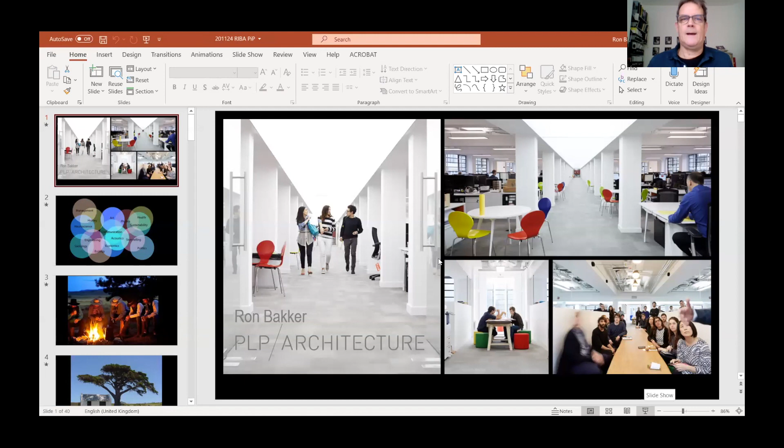Thank you very much, Ruth. I'll share my screen with you. Good morning, I am also in North London. But it doesn't seem to matter much where I am these days. Life just goes on. We actually are in the office as much as we can, because we are absolutely sure that we need to be together physically to be able to function properly. But we're running on about 80% if we're not all together. And I'm sure that's the same in education. My son's in uni and he's not having a great time, just because there's no contact. He might as well be somewhere else.

So I'm going to talk about architecture, smart architecture, and the very fast-moving technological world we are living in at the moment, and how exciting that is for architects. And we are not specialist educational architects. We do some academic buildings here and there, but most of our more interesting building projects do have an angle that's very educational. It happens all the time.

This is our office, one of the most educational spaces you'll see on the screen today. People learn all the time, and I'm assuming most of you are architects. It doesn't matter if you're not, but if you're an architect, you will know that you are able to deal with a great variety of subjects that are often very far removed from each other. And that's what we do, architects, on a daily basis. Pretty much, we're somehow relating things to art and to ecology, economics, acoustics, neuroscience, many issues, and we're actually very well placed to connect all these different strands of stuff that's happening in the world at the moment.

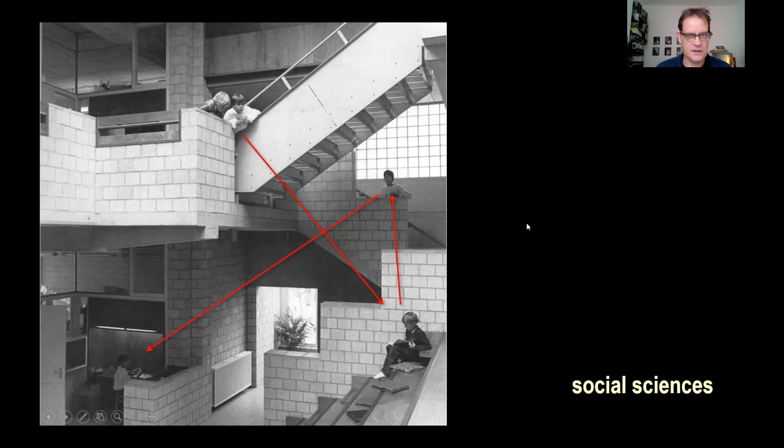Then in the 50s and 60s, we were starting to understand social sciences better, how people relate to each other, what they need in terms of communication and feeling well. That is already 60 years ago, but that's coming back with a vengeance, and making buildings that are really to do about the relationships between people and how they communicate with each other has actually sort of become our headline activity at the moment, despite all the sustainability, all the material technology. I haven't really even talked about architecture, whatever it is by itself, but we're looking at these aspects.

Working on these educational projects always meant that you're dealing with big spaces for lots of people moving around. When we did university work in Amsterdam, that was our main obstacle, how do we move hundreds of students in 3 minutes from one classroom to the other. That was our biggest problem. Not something you realize in the end of the building, but these issues are now increasingly better dealt with through technology, and that is helpful.

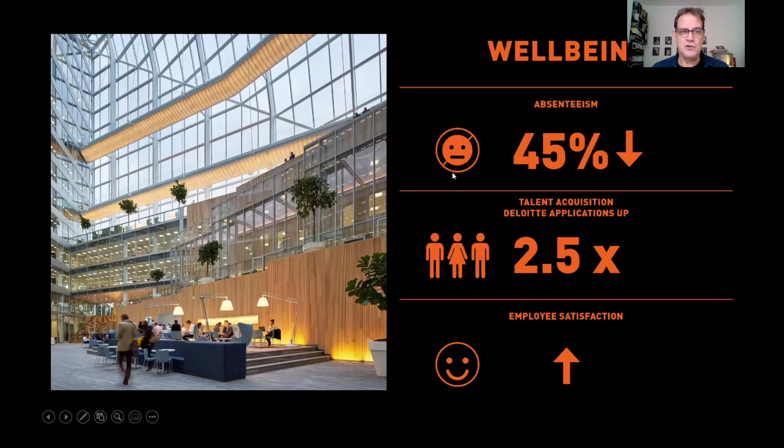And people are happy typically. I walk the building and talk to people, some I don't know, younger, older. I always ask them, how does the building make you feel? Nobody talks about the technology, nobody talks so much about the sustainability and how much energy they've used, but people talk about the space, the light, quality of the light, the acoustics, and the fact they can come together - and coming together is really what these educational buildings and work buildings are for.

When we designed the Francis Crick Institute together with HOK, that was the principle of the project: to make a great big space where people could meet, with all the separate workspaces - the laboratories and write-up places - positioned around this atrium. We were physically forcing people to talk to each other, people who perhaps wouldn't have met otherwise. We did this because we had learned from speaking to scientists that a lot of the big advances in science and technology, as much in medical technology as in any other field, come from moments where two people whose fields slightly overlap talk to each other and have an idea in common. That sets off a whole new trend in their thinking that will often lead to great advances in technology. So that's an incredible notion, and being able to design buildings around that notion is really, very, very rewarding. It seems to work.

It's a busy place at the moment. This year is a strange year, of course, and even stranger for the people working at the Crick. You can kind of imagine.

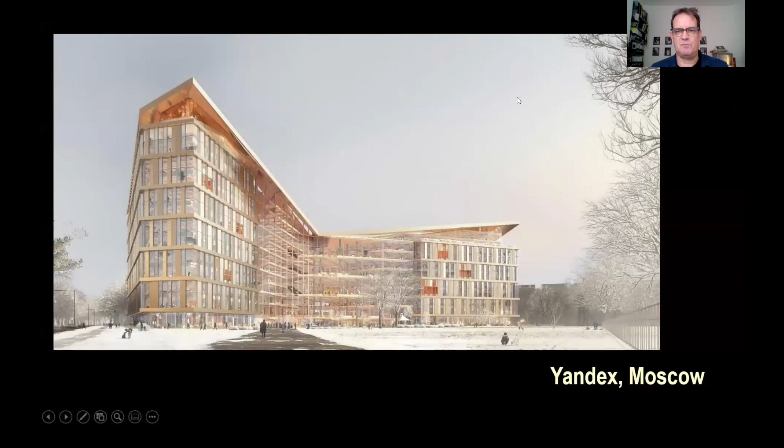So one of the projects we're currently working on is headquarters for a big tech company in Moscow, the kind of Russian Google. We've been talking for years since the first stroke of a pen about how they function together as a group of people and how they want people to learn as part of being part of their company. We've created a building that encompasses a place to communicate, but also a place that's intimately connected through digital means. So everything, all the climate, all the communication, all the work and the data, everything is connected through a very central place that organizes all of these streams of data.

It's a kind of nervous system, I suppose. We can talk about that.

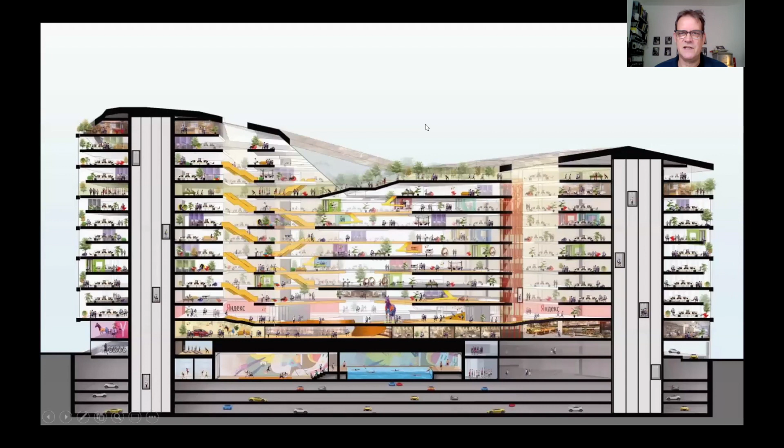The building itself does the things that we just talked about in Edge and Crick. It's very open on the inside, a very wonderful, comfortable space, lots of green, great daylight. But there are also quiet places where you can hide, and you'd be amazed how many people are actually looking for a quiet place. Office space, as we've known it for the last 50, 60 years, really isn't doing very well in terms of making great places for people to work. We have a long way to go.

So these notions of connection, digitally or physically within spaces, are starting to overlap. They're overlapping with mobility, with ecological issues, with biodiversity, with energy networks. All of these layers can now be somewhat more connected than they have ever been in the past.

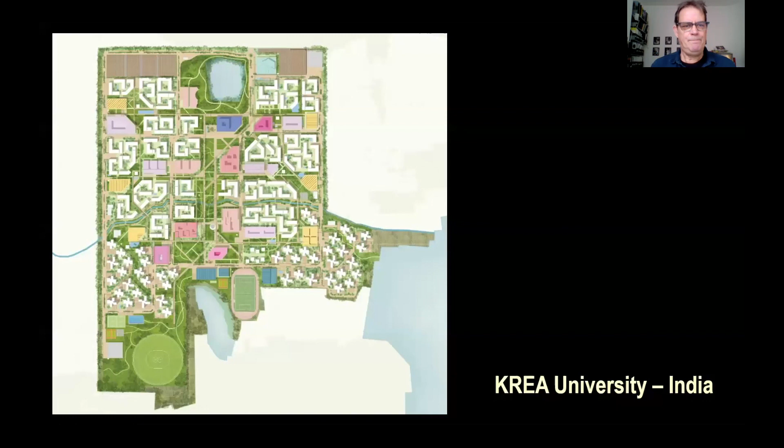And we're developing master plans for a big university in India, in the south near Chennai. This connectedness is the basis of our master planning—connectedness between people, but also between natural systems and buildings. The picture becomes very complex, but I think it's in this complexity that one can really create quality, almost in a way that turns into the background once a building is finished.

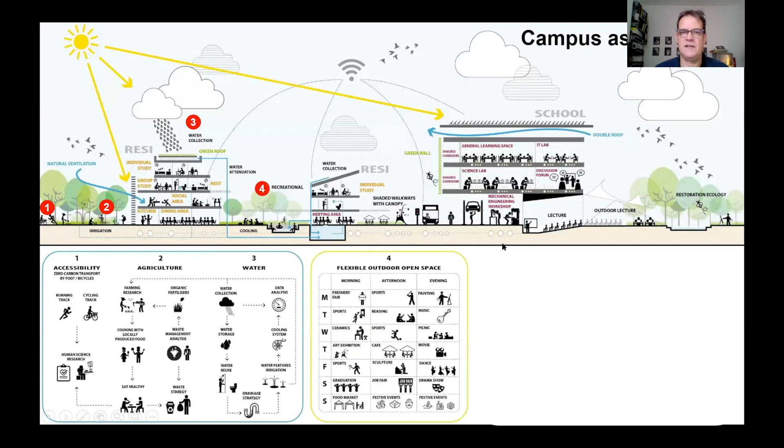So we're looking to connect issues of mobility and accessibility. It's a large piece of farmland, and there's a very strong connectedness between people and farming in India. It's very close to people's minds, actually, so why not include that in a place to learn? There's a big water issue in the area, which is part of it. We're creating all types of spaces for different activities around the campus. Everything happens in the same place—people live there, study there, visit—and the campus is connected to the rest of the world through a digital connection.

So technology and energy and ecology are connected as well. I'm using the word connected far too much, but I think it's all about this relationship.

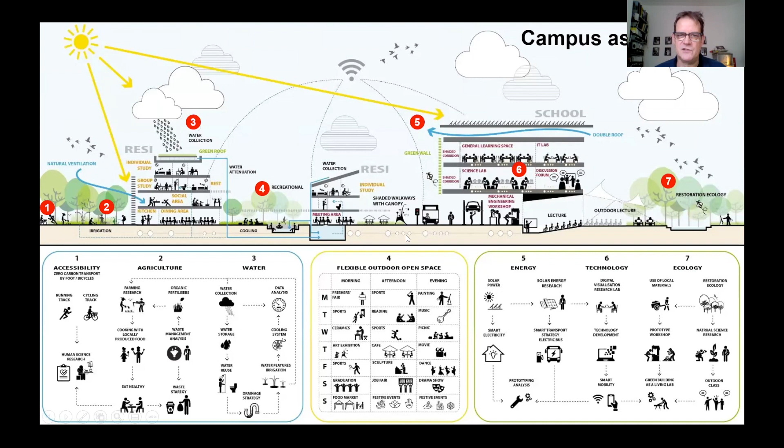There are new trends starting to happen in education as much as elsewhere in the world. We are not seeing the traditional academic buildings anymore—no more departments, that's a thing from the past. Departments are a way of separating ideas, whereas our future is about these ideas coming together.

The idea of the library is exactly the same, only it's a much richer place. It's largely digital, and it can be accessed from anywhere rather than from a specific building. The learning spaces themselves have to be incredibly flexible, because the life of a student moves from one space to another, just as the workplace does in the Edge. These are spaces finely tuned to the type of learning that is happening, so we can make better places than we have for this.

The master plan is taking shape. We're trying to find ways architecturally to make this look pleasant as well as complicated, and as always, it's an overlap of ideas. So the smart part of the campus has overlaps between different focuses—there's a campus-wide focus, a learning focus, and a student focus. Those three have overlaps, but somewhere in the middle there's the analytics part where they come together.

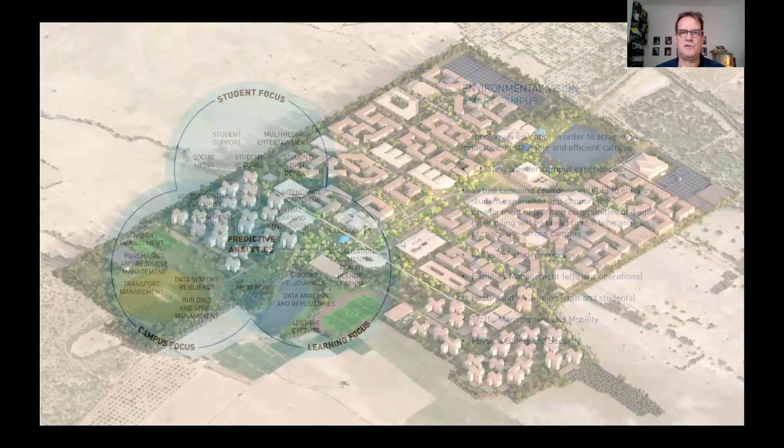We're hoping that with the control of the data this place creates, we can predict scenarios, and we can work with qualities for the future. I think I'm almost there. There's one puzzling shot I always kind of bring into these things, because I've been told quite often that our future as human beings is about the coming together of emotions and data. I can't explain this, but I think there is something in there that might help us start our future.

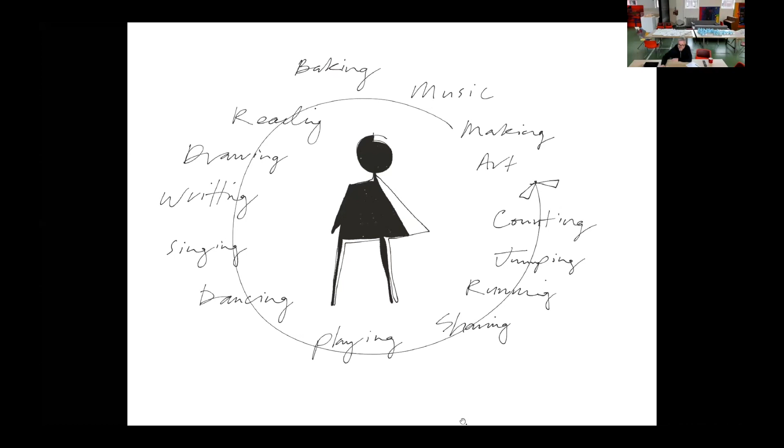The Curriculum for Excellence is essentially a pedagogy which places the student at the very centre of the experience, recognising that students effectively learn in different ways. That's quite a radical concept, especially as we move through school into the secondary context. So I'll demonstrate how we've responded to this rich education theory in relation to the settings we've created for that learning experience.

There's a psychologist who has mapped out the theory of multiple intelligences, how children, and all of us, effectively learn in different ways, through music, through socialization, through physical activity. So essentially what we need from early years through our whole education experience is to look at environments that stimulate us.

90% of a child's brain development happens before the age of 5. That formative time is so critical in terms of the development of character and resilience in young people. And so the environments of early years preschool are as critical to a learner as they are as they get older.

You can see the way that the environments have changed, from the chalk and talk ideas of the formal classroom with a teacher at the front and students behind, to what we're looking at and exploring, a much more complex dynamic setting where there are different ways to learn throughout the day and different ways to work with your teachers in collaborative ways.

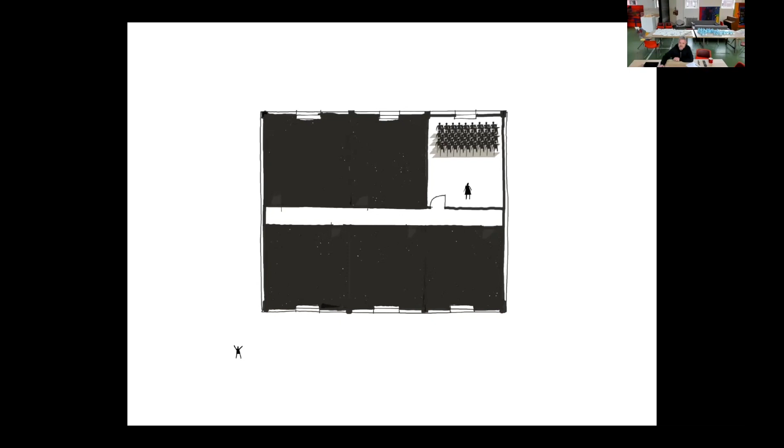This was Broomlands, the existing school which we took on at the beginning of the project. You can see it's pretty miserable and it has very limited access externally. It was a cellularised, compartmentalised space where teachers weren't communicating, they were isolated, and the children were essentially contained within a class with no external awareness.

Over the course of 10 years we've looked at the classroom environment, not to create compartments in a cellular classroom structure, not to create open plan, but to create a hybrid of spaces that you can choreograph throughout the day in multiple ways, so that throughout the life of a week the environment can change. You can team teach, you can externalize, you can do one-to-one teaching, and it becomes this really dynamic landscape and spatial experience, which builds a much richer place for a student to grow and become an individual on their own terms.

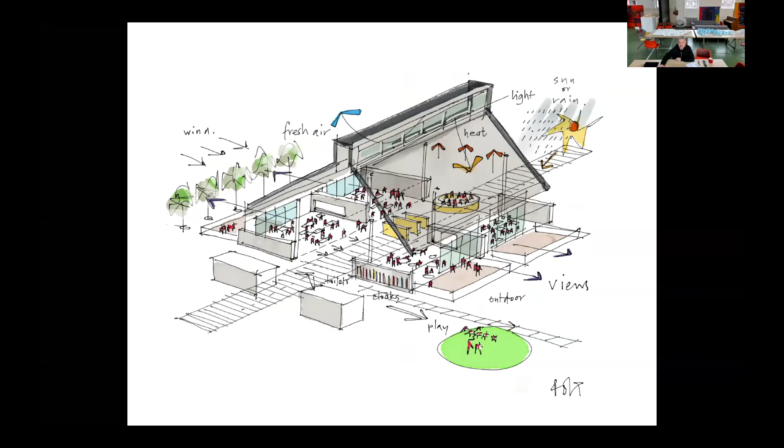We've looked at various permutations of how that space comes together. Taking that idea, the DNA of a series of classroom clusters, we looked at various contexts in the Scottish borders, and at the site in Kelso for this school called Broomlands, and began to orientate and develop the cluster forms to respond specifically to an exact site, thinking about the uniqueness of that location.

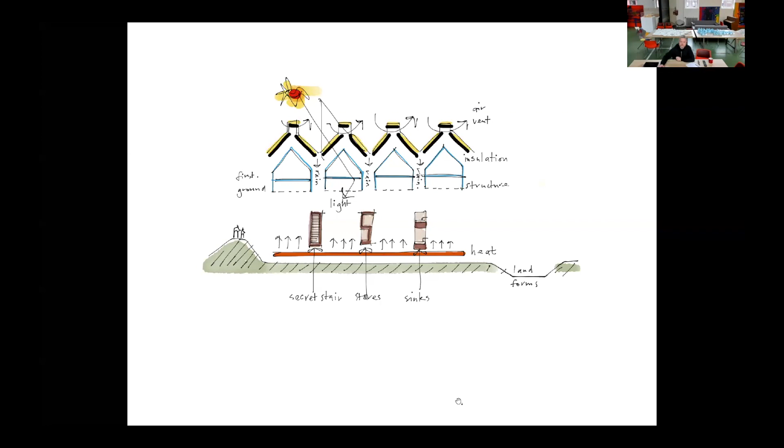The borders is just a spectacular area of Britain. The scenery, the landscape, are really just beautiful. So all of our projects working with the Scottish Borders local authority respond in dynamic ways to these unique settings. In this instance, it was a kind of perfect green field surrounded by trees on all sides.

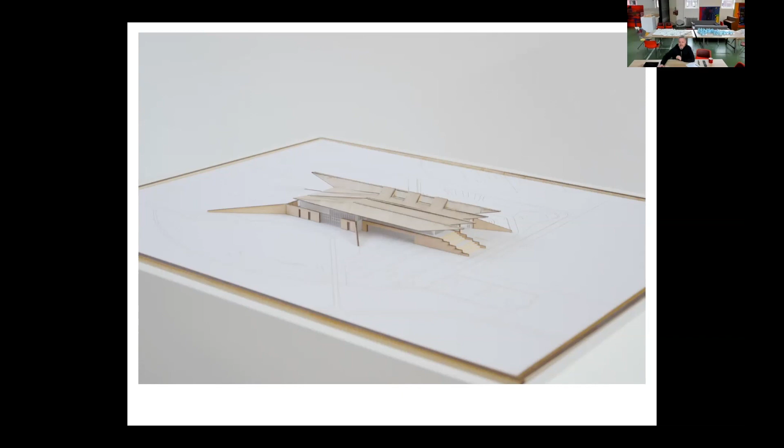Our building was very much about keeping low to the ground and creating canopies that the children could come out of their classrooms and externalise under, so that relationship between inside and outside was broken down, and the whole connectivity with the place and the town was reinforced.

Figuratively, the building picks up on features of the Borders landscape in terms of its scale, its roof structures, the kind of landscape forms—its signature—the idea of boats, the upturned metaphor that Miralles used in the Scottish Parliament, the idea of external classrooms, and just creating an experience which is thrilling in a way.

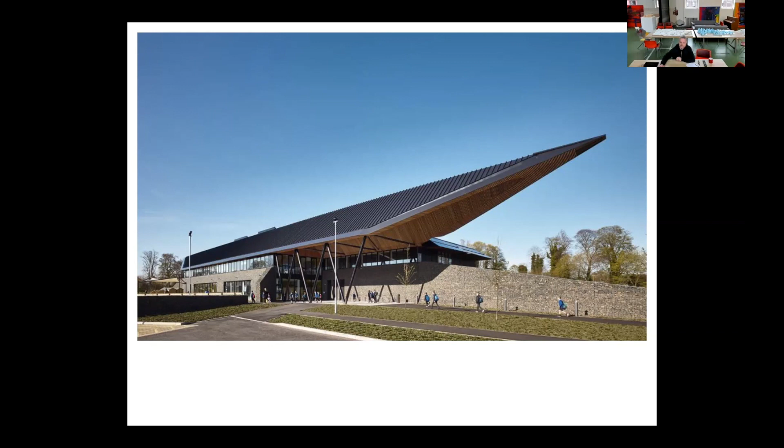This is the entrance to the building, and it had to speak to the community because the school isn't just a school, it's very much a community building. They wanted a really expressive entrance where parents could gather when picking up their children in the rain—obviously it rains in Scotland—a building that really invited and said, we're open, come in.

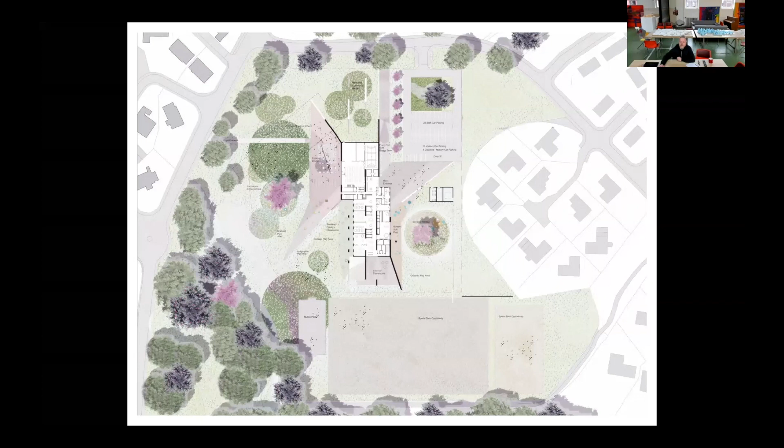You can see the scale in terms of its relationship with the ground, the trees, and the sky. On its south aspect, we created an overhang which creates almost like a terrace. There's a community football pitch in front of this, which the community can gather at on weekends to watch a game of hockey or football. So it's very much set within the context of the community.

So that's the easy one, primary. Primary is in some ways spatially fun to respond to as an architect, and there's a level of openness and playfulness that you're allowed to explore.

It becomes much more difficult when you start to look at secondary education, and this is where I really want to make some critical points. When we started looking at secondary education in the Borders, this was the first school we looked at, in Galashiels. Again, the site and context is spectacular, but you've got a classic 60s slab block here.

Galashiels got a very poor HMI report. Essentially what was happening was the entire school was departmentalised, so teachers were in staff bases and didn't speak to each other, and the students trudged up and down corridors between departments. I remember drawing this little sketch when I came back—even despite the landscape it was in, it had a yard, literally a concrete space where the children were contained.

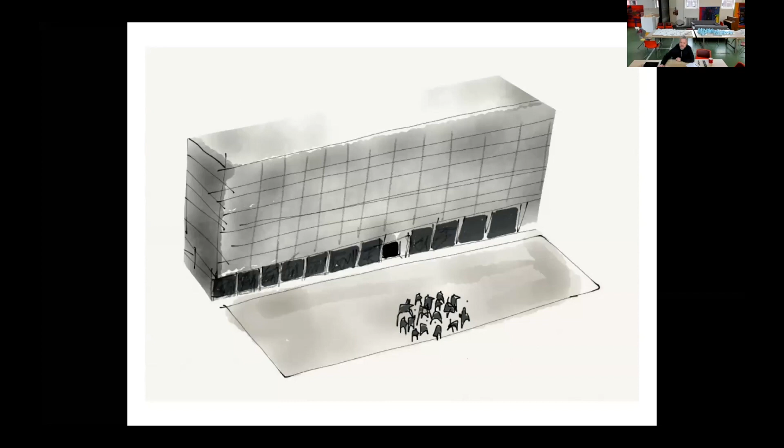So there was no breakout space, no dynamic space for socialisation, and again you see, like the primary school, this compartmentalising of subjects. To be clear, in Scotland we have 5 learning stages, from early years and primary through to secondary, all the way to around 6th year, where you enter employment, college, or university.

What we basically did was deconstruct these learning stages and understand where the challenges were. We had become expert in early years and primary education buildings, but we wanted to really provoke and challenge a debate on the secondary typology the government has been promoting. There are 2 exemplar projects the government promotes, and these transition stages are where learning fails and pupils have real challenges—between primary and secondary, between early years and primary, and when leaving school for college. So we wanted to start looking at a much more blended experience.

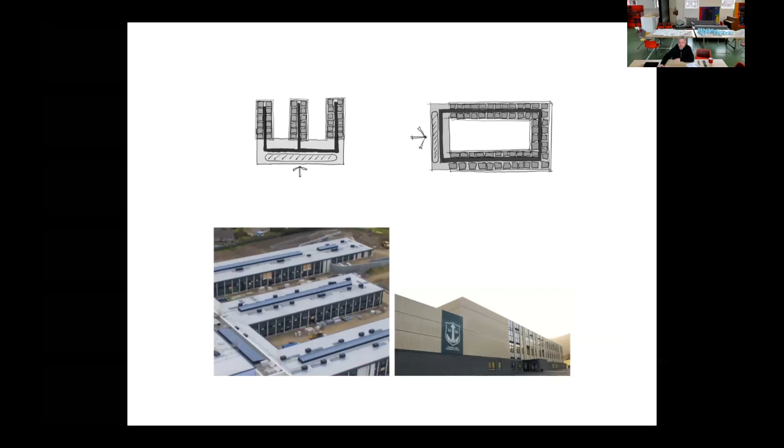These are the 2 exemplar plan typologies the government has been promoting, which we have resisted: the fingers option and the courtyard option. You can see, essentially, they haven't changed for 50 years. As a form of plan, it partitions education, and despite the curriculum being quite progressive and promoting student-centred learning, the architecture works against that intercurricular working.

So what we've fundamentally done in developing a new type is radically reimagine how the school spatially comes together. Departmentally, what you had previously was all these compartments—modern studies, geography, language, maths, chemistry, etc.—all partitioned, not speaking to one another, with students suffering the stress of having to focus on every one without any overlap. My daughter studied modern studies, English and art, and one day she came home with 3 essays on feminism, because none of the teachers were combining or talking to one another.

So our view was that secondary education should be much more like primary. It's harder to manage because of the complexity of the subjects studied, but it's not impossible. What we began to look at was whether we could create a secondary which was a sort of glorified primary school, in a way that allowed that connectivity.

So what we have created is basically a secondary school with no classrooms. You stay in your learner stage, and you are within a gigantic studio space. And within that studio space, there are all different types of settings - there are one-on-one spaces, there are classroom spaces. It's much more. It's much richer.

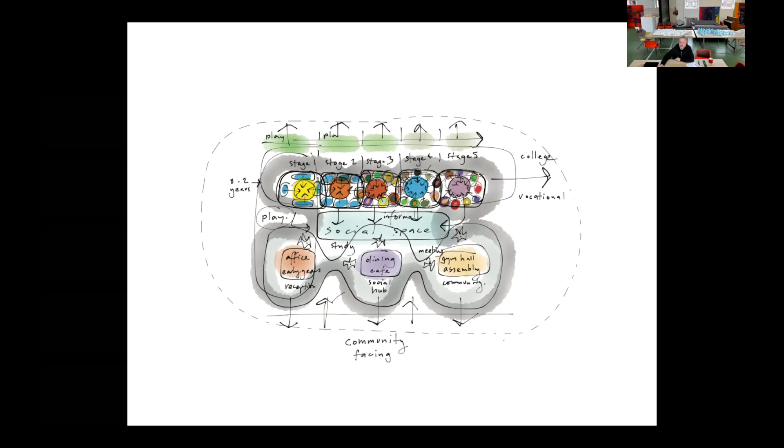So we effectively took that curriculum and that learner progression plan and mapped it spatially into a new school diagram to create a different typology. And we expanded that as a building out into a landscape. So the learner stages relate to the landscape as you progress through, all the way through to 6th year, where you can study car mechanics, carpentry, or gardening. There's all sorts of ways in which that can respond.

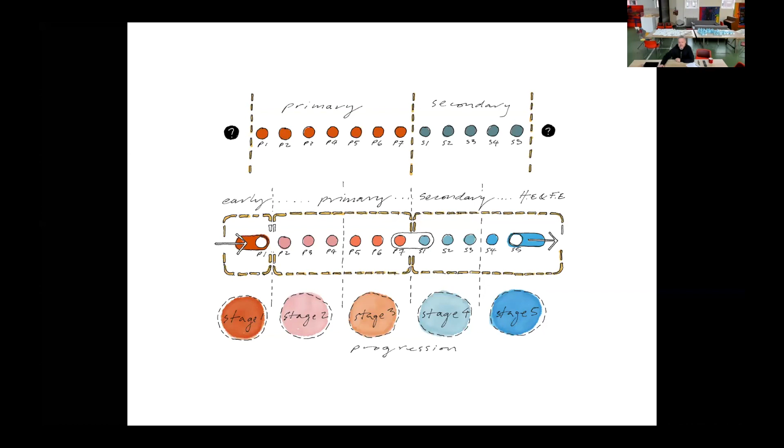And importantly, these buildings increasingly are becoming much more public. What we developed was, instead of the curriculum being from 3 to 18, our buildings are 0 to 100. We want everybody to be able to access the buildings. So our campuses are now becoming intergenerational. The only spaces that we're effectively securing are the early years, in terms of locking them down, keeping students safe. But everything else - we have a cook school, we have art and craft - all of these spaces are accessible to the public all day, not just at night and not just at the weekends. It's a civic building that happens to be a school.

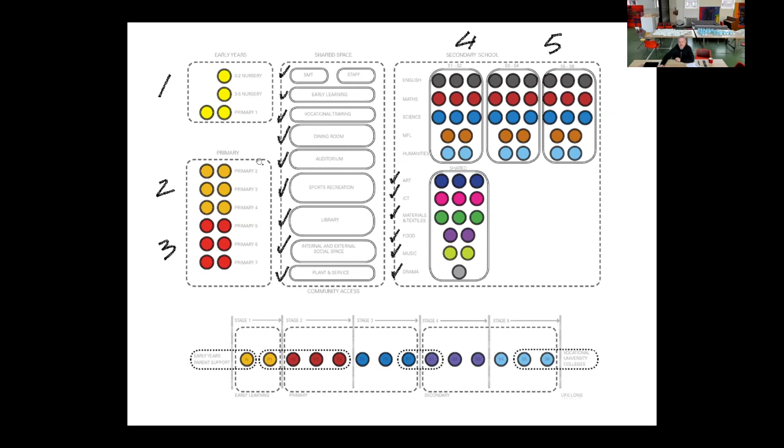And it's much more radical. In terms of the kind of learning stages and the clusters, as I say, not having classrooms essentially creates a big funky studio with all of these incredible different spaces and areas where people can come together. In Jedburgh, one of the challenges was there isn't a flat site, and the whole of the borders, apart from a couple - one was Broomlands - the topography is just so hilly. And Jedburgh as well, it's a very medieval town with a 12th century abbey, so we were very, very challenged, if you like, in how we were going to respond.

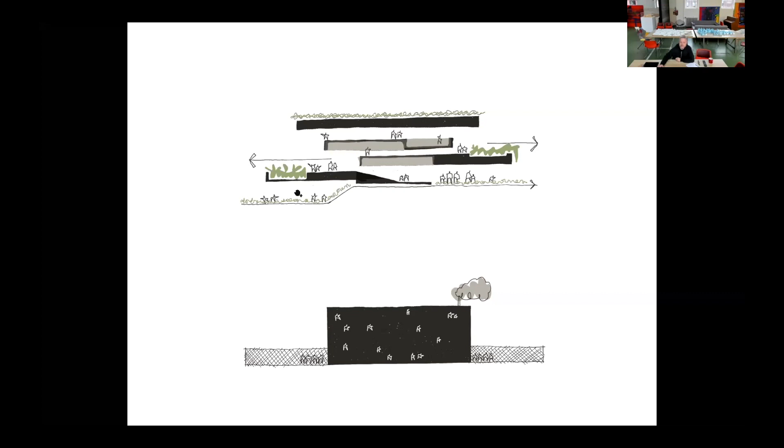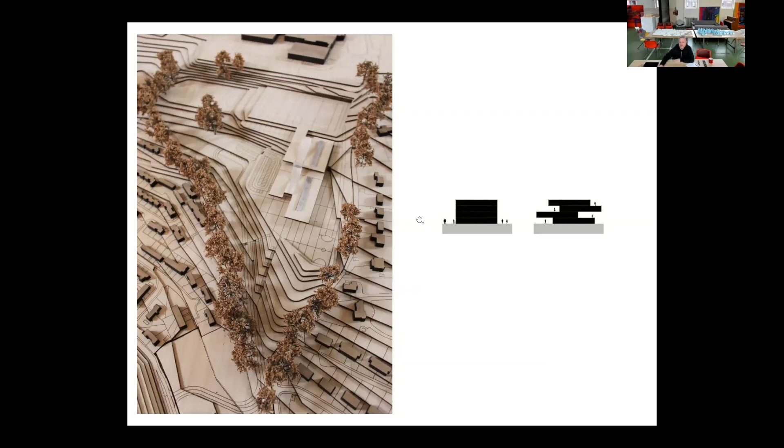And what we looked at was, every school in Scotland through the kind of hub process at the moment is tending to be a box. And so we looked at deconstructing that box horizontally and taking these ideas that we've developed and integrating them into the landscape. So here's this built diagram of the learner stages all the way through to the upper years, and then the community function to the side and the internal street. And all of that relates back to the landscape. So as you terrace up in those kind of spaces, you have direct access out into the landscape.

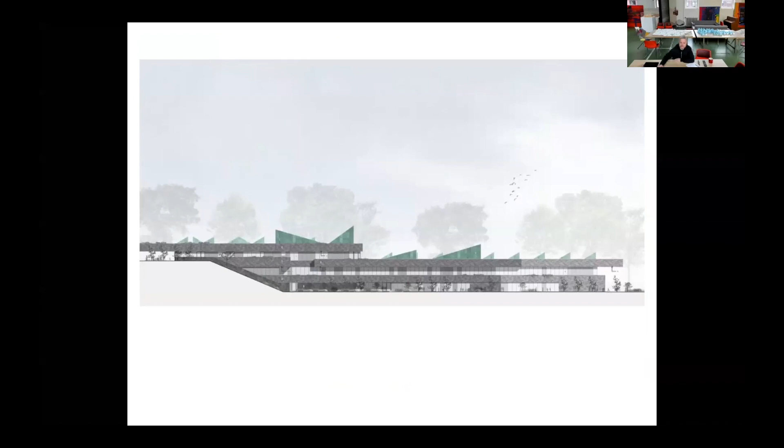You can see some of these images of our model here, and just the scale, and the beginning of an architectural idea. Jedburgh was home to a geologist called Hutton, who discovered the tectonic plates. It's called - he termed this - Hutton's Unconformity, and we developed this idea of Jedburgh essentially looking at almost being stratified like a geological feature. So you can see how we've developed the architecture and series of spaces as we progress through.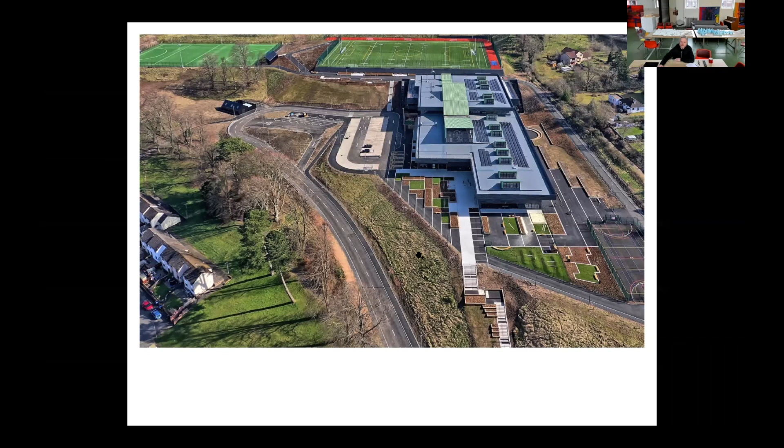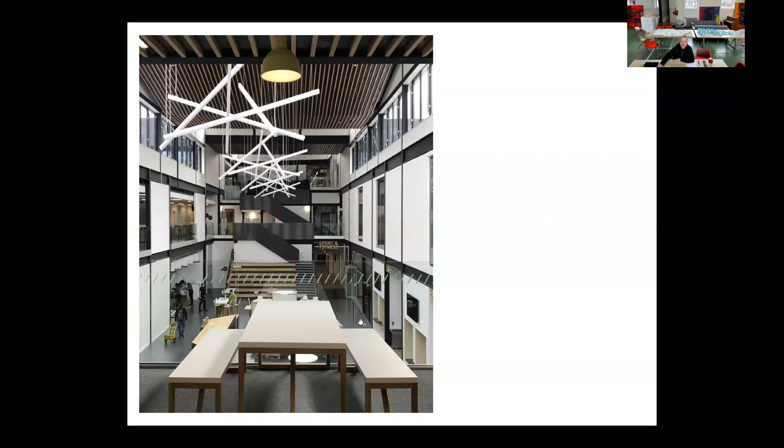We've not had the opportunity to go into the space and take good photographs yet, but the idea is that not only in plan do we have that dynamic space, but also in cross-section. Everybody can see everybody, the clusters connect to the social space. Your mum and dad might be in here taking a course, or your grandmother doing a yoga course, and you're all connected. It's an extension of the high street.

Just flick through these images. I just wanted to end by saying that essentially the second critical area of brain development is in adolescent times. Essentially the brain is going through what's called a pruning stage, where the plasticity of the brain is kind of crystallizing. You're cutting away things that you don't need, and that explains the challenges that young people have in this time.

And it's the whole reason that we're essentially creating this new typology in Scotland - to address the well-being agenda, because for too long now the priority has been on attainment, and the stressors on children are just significant. So it's proven that if you prioritise well-being over attainment, actually attainment goes up.

And we're working with the mental health minister on this new philosophy, if you like, of well-being. And just to say, this is very personal to me, because this picture here, this is my son on the left. My son took his own life three years ago because of the challenges he had at school, because of that institutionalized setting and the kind of challenges that presented.

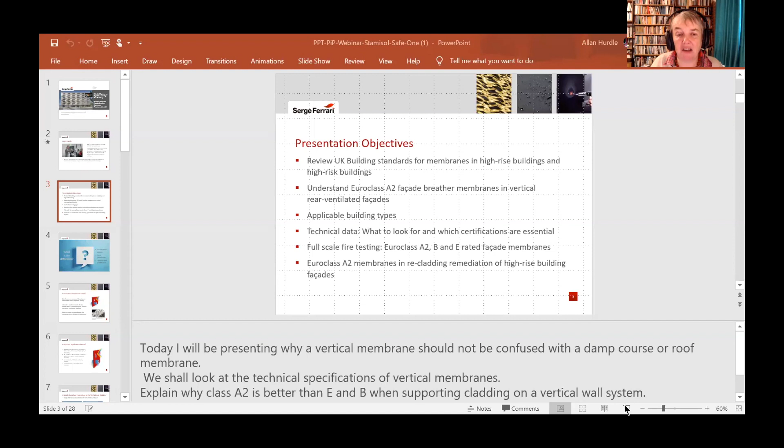That's really fascinating, thank you very much. I think we could talk about this for a long time, but we don't have infinite time, so we are going to go on to our next presentation, which is the last one before we have a break. That's going to be Allan Hurdle from Stamisol. I think we can all agree that on the one hand, we want to talk about really exciting and dynamic ideas for our education buildings. On the other hand, it's also essential that they should be safe. So I think the fact that Allan is talking about fire safety is really pertinent now.

Over to you. Okay, right. Hopefully you can all hear me. Yes. So today what I want to do is just give you an overview of the Stamisol Safe One building facades for a building high-rise, or sorry, a vertical wall system.

Myself, I'm the technical consultant for Stamisol Safe One, and I'm looking to raise the profile of A2 membranes as part of the vertical wall system. I've been involved in the HVAC, heat ventilation, air conditioning markets for over 32 years, specialising in HVAC products and specifically for smoke control. I'm technical consultant for the Smoke Control Association, and I'm dedicated to helping raise the bar on the importance of smoke control with A2 membranes.

With A2 membranes fitted to buildings, effectively what I wanted to do is present to you why a vertical membrane should not be confused with a damp course or a roof membrane. We will look at the technical specifications of a membrane and why an A2 is better than a Class E and B when supporting cladding on a vertical wall system, and hopefully we'll also look at the independent tests that should be carried out to confirm an A2 classification.

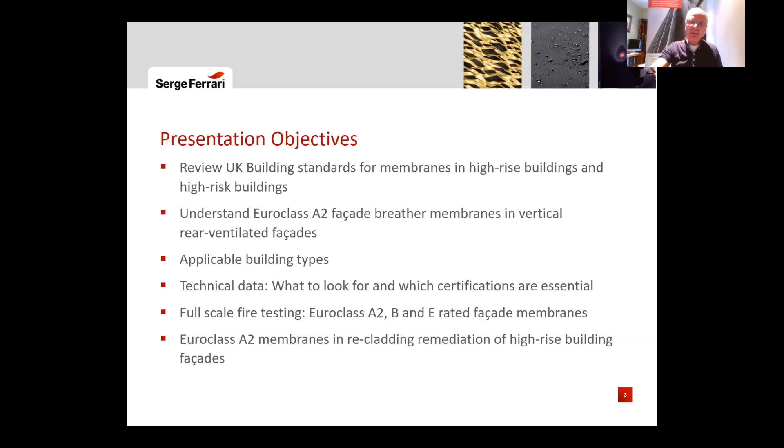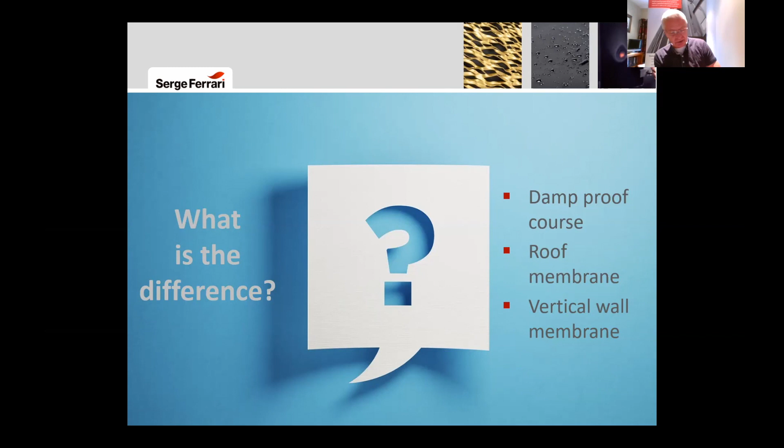It is important to understand what a vertical membrane offers compared to damp-proof or waterproof membranes, as membrane itself is a generic term for a product, so it does not differentiate between the different types. You have damp-proof and waterproof membranes, but these are not part of a vertical wall system. However, the name membrane still falls within this family, and these are considered low risk in times of fire, and therefore are exempt from being a Class A2 S1 D0 vertical wall system.

The characteristics of a building membrane are they've got to be UV resistant, water resistant, windproof and breathable, all in one product. An example of this structure would be human skin or a Gore-Tex coating. Part of the product's aim is to keep the thermal insulation blocks dry and therefore functional.

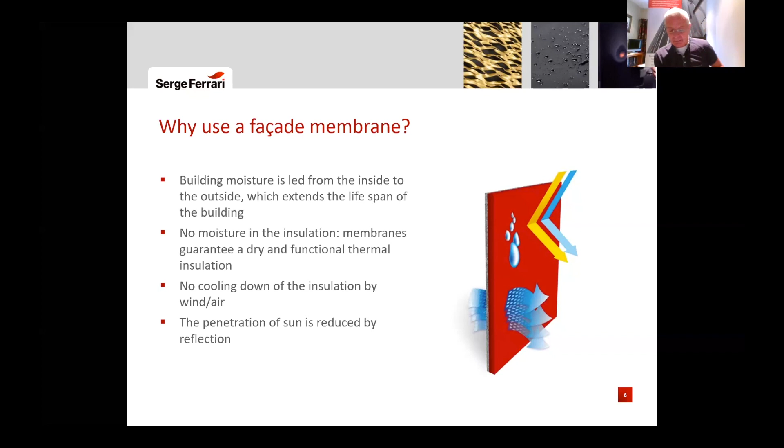A2, or in the UK limited fire membranes, assist in reducing condensation build-up in the building structure. It's there to help keep insulation values high and contribute to the building's energy saving programme. It can at times be used as an open face for cladding with 50mm gaps that act as an architectural feature.

The membrane, when installed behind cladding, helps create the closed system as proposed in Approved Document B, Part 4. Without a membrane, this slide shows what could happen to insulation and the risk of damp and health problems associated with damp spores.

Bacteria could pass into the building via the cavity or the air bricks and finally into the occupier's airspace. In this scenario, the cladding was placed directly over the thermal insulation and fungal infestation took place, resulting in the outer wall system having to be stripped and refitted with new thermal blocks and then a membrane and the final cladding.

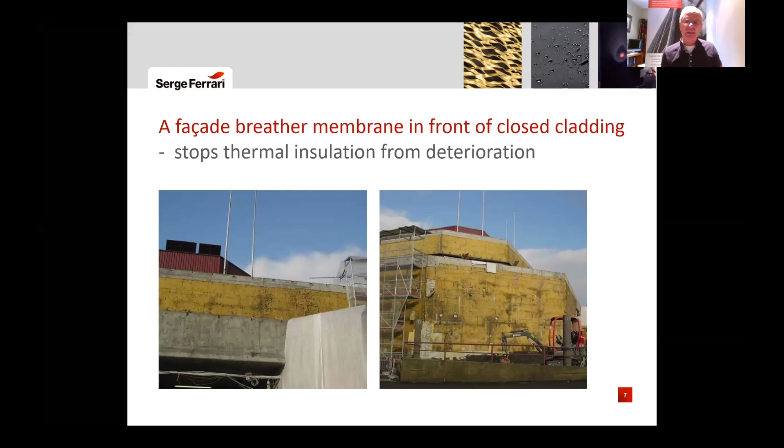Given that a Class A2 S1 D0 is now available, Approved Document B should be changed to only specify A2 in support of a wall system. The reason being that at times Class B membranes will burn at high temperature and give off toxic fumes, and poorly fitted membranes with incorrect cladding will contribute to fire spread.

So when changing cladding, it makes sense to remove the Class E or B at the same time. We propose that Approved Document B Part 4 is modified to include A2 membranes, and membranes should not be exempt. By raising the profile of Class A2, architects can now specify these, and we should not accept that low price will override safety.

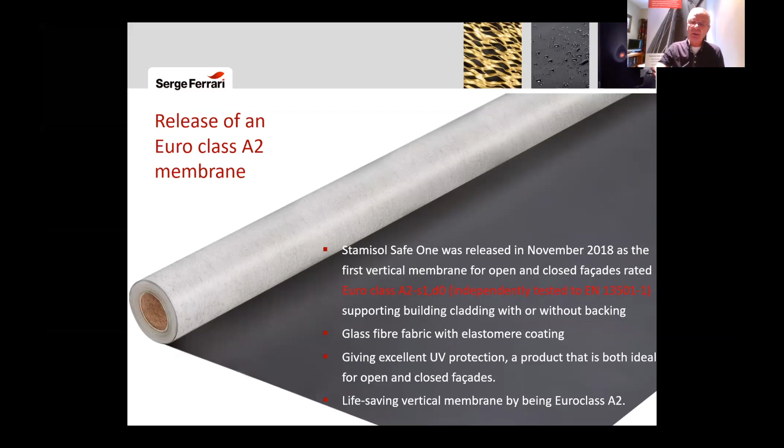Dame Judith Hackitt has been quoted many times as saying, given the clear evidence that continues to emerge of concerns about high-rise building safety which go beyond the ACM cladding, we believe there is a moral obligation on the industry to step up to different approaches. Over the next year, she aims to recognise and accredit those organisations that are stepping up to deliver improved practices.

Nick Coombe, MBE and a member of the National Fire Chiefs Council, said that of 500 buildings inspected, 65% had safety failures. Now, these failures covered a multitude of problems found within a building, but it does show the size of the safety concern that needs to be addressed.

When I started on this slide, originally there were 250 existing buildings. Now we're showing upwards of 457 buildings that need to be reclad. It has now been established there could be up to 2,000 buildings with incorrect cladding. Well, how many buildings have membranes that could catch fire or give off toxic fumes?

The IFSEC Global Report in July 2020 estimated that over 500,000 people across the UK are living in buildings with combustible cladding. So if cladding has to be removed, why not remove the Class B or E and replace with the A2?

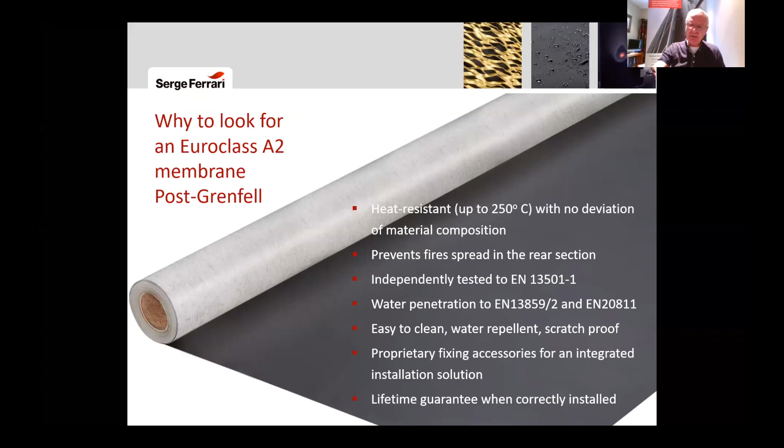Following Grenfell, it was clear that a change in building safety was needed for the security and safety of residents and occupiers. The use of an A2 exceeds the current requirements of Approved Document B and C for permeability, weather control and condensation, plus giving this added protection on the outside and into the inside of any building.

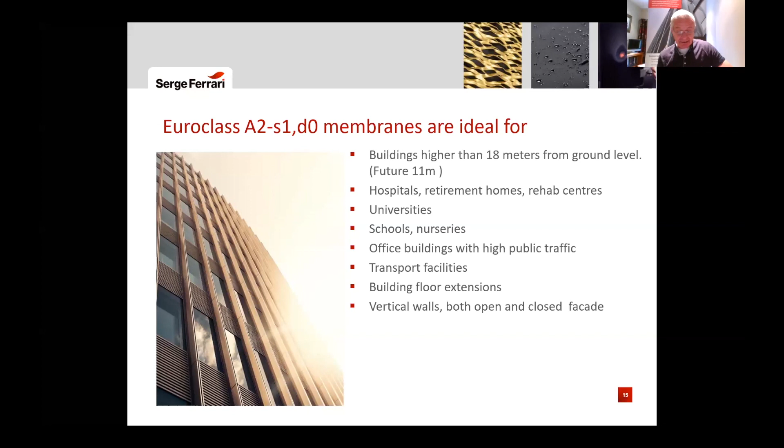A2 facade breather membranes are for use in vertical wall insulation behind closed or partially open facades and rain screens. It is rated to A2-s1,d0 to EN 13501 Part 1, and it is UV resistant for partially open facades with a 50mm gap or a maximum area of 50%.

The expectation is that customers and installers will have some experience of fitting vertical wall systems, and they should hold a valid CSCS skill card to level 2 and an NVQ for the building industry.

One of the features architects look at for the design of high-rise buildings is obviously to make it look cosmetically good. At present, there is only Class A2 in black available, but it still can make a very good architectural feature.

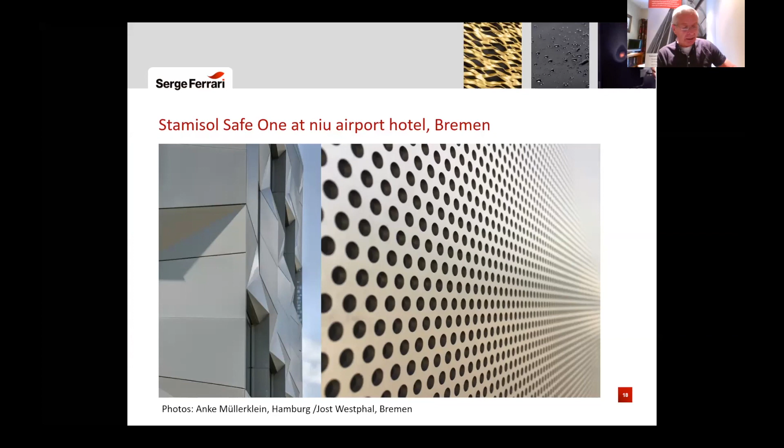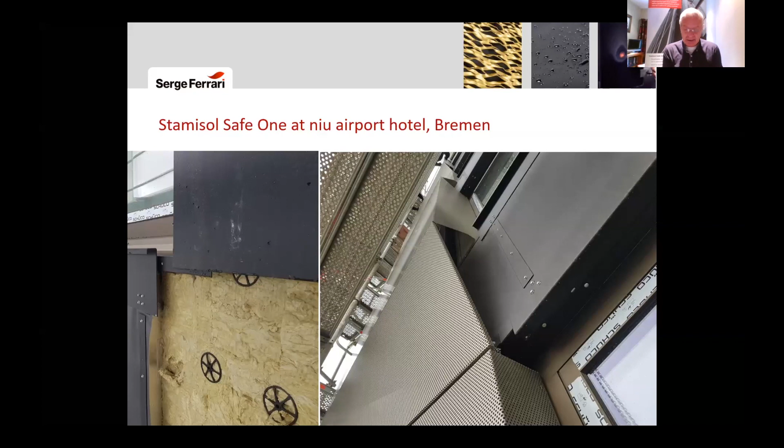It is often asked how the membrane sits in front of thermal blocks, and this slide shows how the thermal block is attached to the wall, followed by the membrane, and then by the final cladding.

S1 is smoke opacity or obscuration, and means limited smoke as an S1. d0 means no hot droplets. So the A2-s1,d0 is the ideal solution for vertical wall system membranes.

There is an in-house fire test which was completed on 4 classes of membrane, being F, E, B and A2. This video is available to view on the Stamisol website, www.stamisol.com. You will see from the video that Class F ignites and burns quickly. Class E ignites at lower flame levels, giving off toxic fumes, and these are a problem. Class B ignites at high temperatures but will give off fumes. Class A2 did not ignite, with limited fume development.

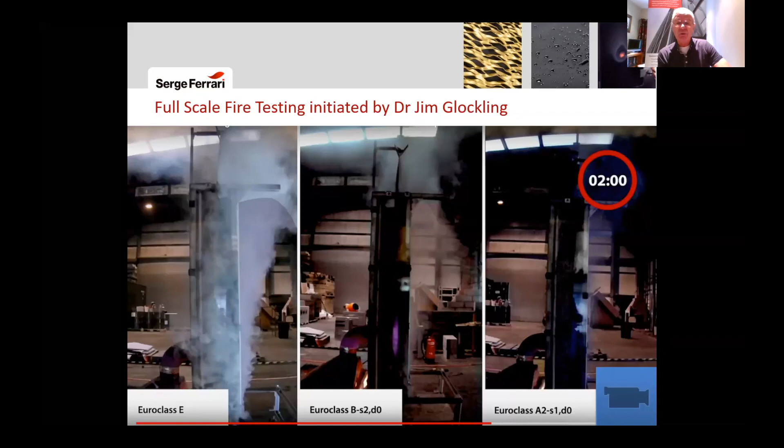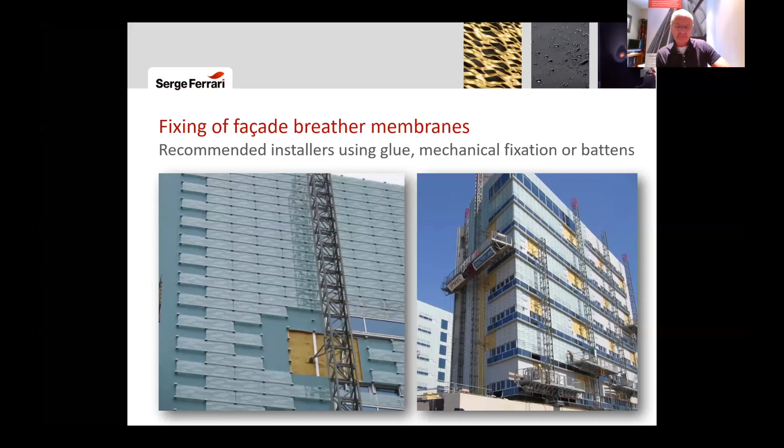So what are the types of building materials that a membrane can be attached to? They can be attached to weatherboards, concrete blocks, bricks and cement boards. They should be fixed utilising aluminium battens for tightness and giving minimum air pockets, and use the necessary Stamisol glue to hold one membrane against the other at no more than 50mm distance.

So what is a summary of what an A2-s1,d0 membrane should ask for? These are points you should consider when reviewing and specifying a vertical membrane. You should first of all go for the A2-s1,d0, be water resistant, independently tested, with no fire ignition. You should ask to see a copy of the Declaration of Performance with the independent test certificate, with UV guarantees, and ensure it meets UK building regs and Approved Documents.

There is a full presentation that we will be holding on the 15th, a demonstration again, and details can be found on the Stamisol website. So thank you, and I'll hand you back, and hope you found it of a certain amount of interest for future buildings and any possible recladding programs you may have.

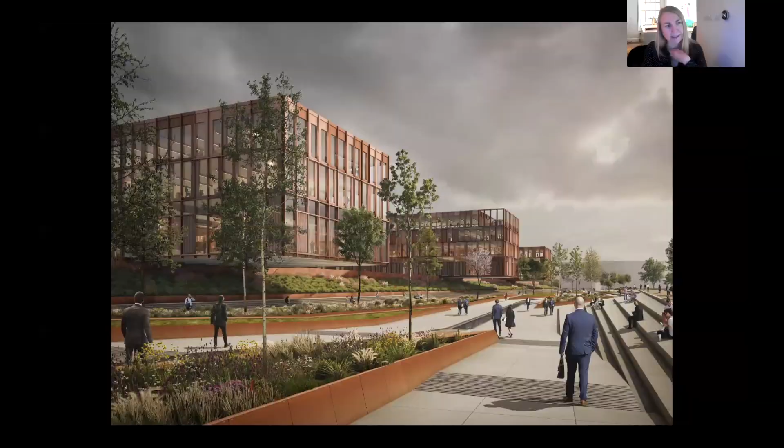So today I'm talking to you about Tufnell Park. Tufnell Park Primary School is a really interesting mainstream state primary school in the middle of Islington.

Really interestingly, because we're a public sector practice, we spend an awful lot of time doing bidding. For those of you that know about the bidding process in the UK at the moment, it's a really quite hefty process. You have to be very reactive to a bid coming out. Then a bid does come out that suits you, and there are several stages of getting through that bid, which is often an expression of interest, then a pre-qualification questionnaire, then a tender document, and then potentially an interview.

And from beginning that bid to kind of arriving at a paid job can often be 4 or 5 months.

So what was really interesting for us about Tufnell Park was that we were working with a contractor. We just finished a couple of schools with a contractor, Morgan Sindall, and they actually asked us to be part of this bid with them. So therefore we bid together, but it was effectively just one stage. And in our world, that's quite unusual and actually made the process quite easy.

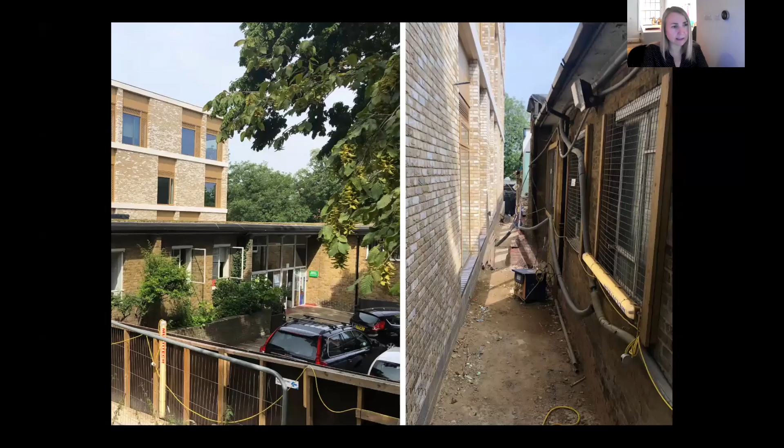And this just gives you an impression. I mean, I have tough working relationships with contractors, but when you see the kind of level they will go to build a school, and the kind of level of precision and how closely they can work alongside an existing building, you really realise that you're definitely working with top tier contractors that can do this.

So effectively, Tufnell Park Primary School ended up being a fully off-site constructed solution, apart from the external envelope, which was completed on-site, and that's just the kind of final brick finish.

And we worked with Morgan Sindall and Eco Modular on this project. And Eco Modular pride themselves on being a bespoke off-site component construction. That's how they describe what their product is. And that is because you work with them extremely closely to kind of realize your design. And that's something they're very proud of as a company.

Their factory is in Hull, and many of you will know that an awful lot of these off-site companies are based in Hull. They have huge factories.

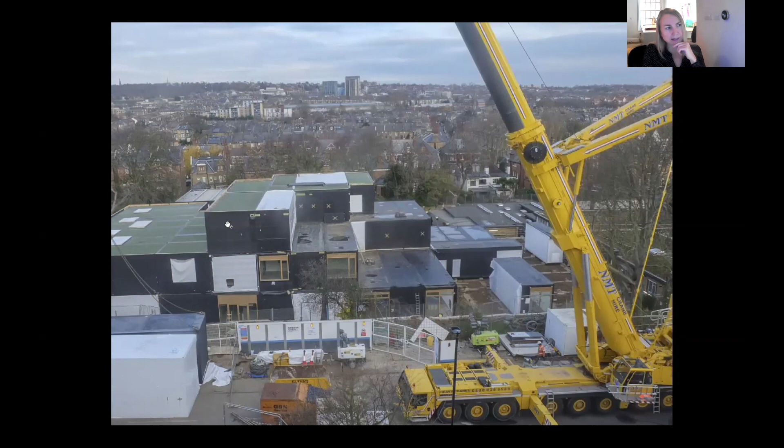And this is the building coming to site. You can see it was an extremely constrained site because the site compounds were actually on the road, and you can just see in the corner the Portakabin, which was the temporary school behind as well. These were just different elements of the whole project coming together on site.

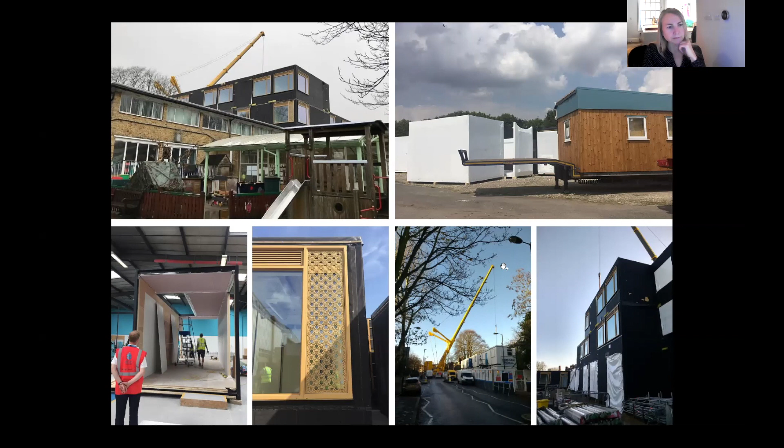So if I just talk you through the actual school design process itself, although I'm not going to dwell on this too much because we want to talk about the challenges of using the offsite process. But it was a 3-form entry school.

This particular project wasn't being procured through a Department for Education framework. It was actually being procured directly through Islington, which in some ways was a positive thing. But nevertheless, the challenges of working with the Department for Education's output specification and working within the space standards of Building Bulletin 103 were very much upon us, and that was the framework we were working in. So while we weren't working specifically for the department, Islington had commandeered all of their standards, and that was what we were expected to do.

We do an awful lot of technical advisor work with the government, so that wasn't necessarily a problem to us, but they're demanding standards, and in terms of space and circulation, they're extremely difficult standards to meet. There's still a lot of forum about whether they're working or not, but nevertheless they're very demanding.

I'll show you the plan so you can see the impact of how the system came up in terms of the plan, and we can talk through the whole solution, and I'm just going to go through the concepts as well.

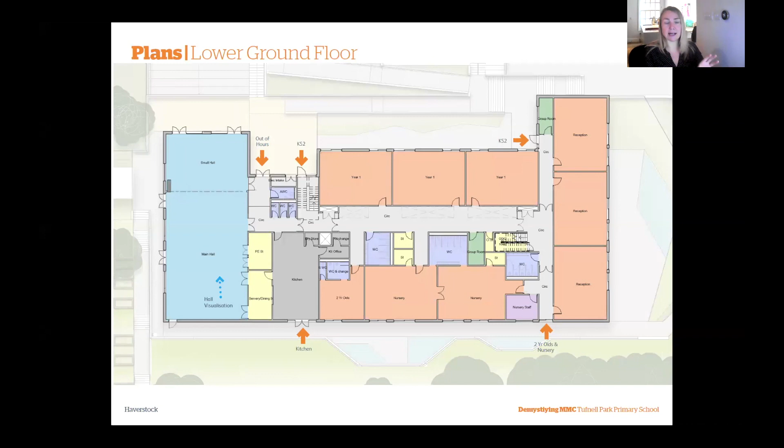This particular building's site has very complicated levels. The street level is actually at first floor level as opposed to ground floor level, so there's a lower ground floor, a ground floor at street level, and then a first floor level. If I flick through these slides, you'll see the kind of repetition the system forced upon us, which isn't necessarily a problem, but you can see how the stacking was working.

At the outset, the plan had always been for the hall element to be a traditional element built on site, but in actual fact Eco Modular were very keen to prove they could do that with their system.

I think from our point of view it's interesting because it's a solution that doesn't necessarily mean all offsite solutions conform to very specific grids, but you're pushing and pulling in lots of directions. Quite often in terms of space standards you have to move. We moved above the space standards, not by a huge amount, but the very notion of fitting the Lego bricks together did mean we went slightly off on area.

That was something Morgan Sindall and Eco Modular just stomached as part of their system, and so the cost plan wasn't amended because of that. That was just all part of the process.

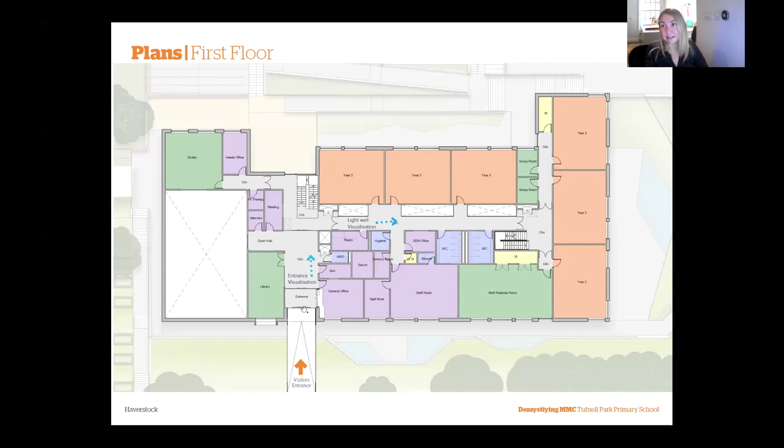And I think, hi. Sorry, I think you are going to have to start winding this up because you've actually run through your presentation time and your question time. Oh, sorry, I'm so sorry.

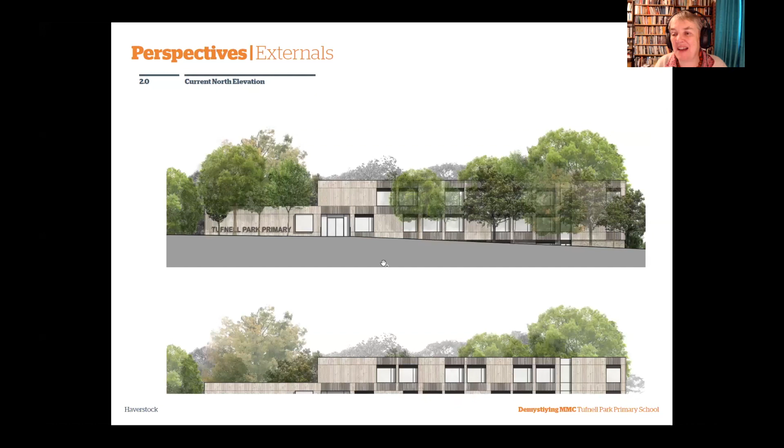So I'll just quickly go through these elevations. Just so you know, it was a project that was supposed to be done in timber, but we eventually had quite a lot of issues with planning, and the conservation area dictated that the solution needed to be brick.

So the solution that came to site was only fitted to the breather membrane, and the brick was actually applied on site. That did have some implication on cost and program, but overall the offsite solution still benefited the program and the cost.

So these are just some of the elevations that we went through.

From our point of view, we're really for offsite solutions because we think it gives a higher quality due to the factory finish. It's definitely robust, so preconceived ideas about it not being robust just aren't true. It can be bespoke and doesn't have to look like offsite. Obviously it is quite a repetitive solution, and that's just a reality of the system. It's not necessarily cheaper, and the contractual management elements aren't perfect. There's an argument that eventually, on this project, they needed our support in terms of the output specification and working with Department for Education standards. In the longer term there's an argument that we're always working with in-house architects at the offsite companies, so there's unarguably a diminishing role for the architect.

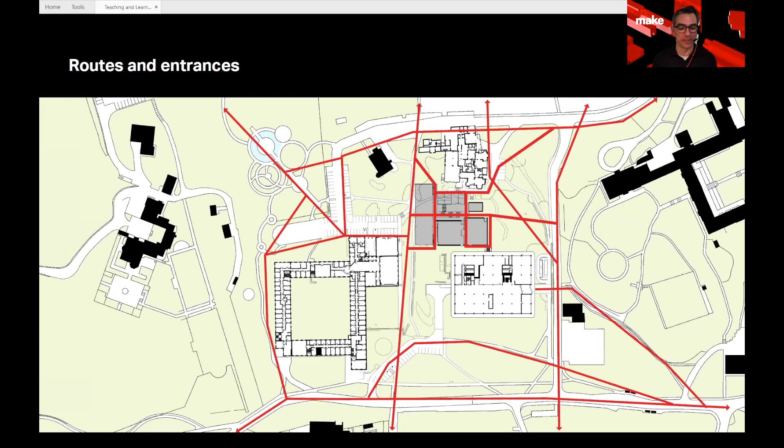And then this is the building on the site. I think fundamental to our design approach was making sure we plugged into the campus and understood how people were moving around it. The Teaching and Learning building is a centrally timetabled building, so no faculty has ownership over it. What was important was that it's positioned at the heart of the University Park campus, and it needed to be accessible from all orientations. So we spent a lot of time understanding how people moved around the campus, making sure we had multiple entrances positioned where people really needed to enter the building, and then they converged on a central courtyard.

We spent a lot of time working with all different user groups, including students, the student union, academics, and library services, to really understand what the needs were for the building and how people were planning to use it. What came out of that discussion was that teachers and students wanted space which they could adapt and modify to their needs, which I'll talk about in more detail as I discuss the design.

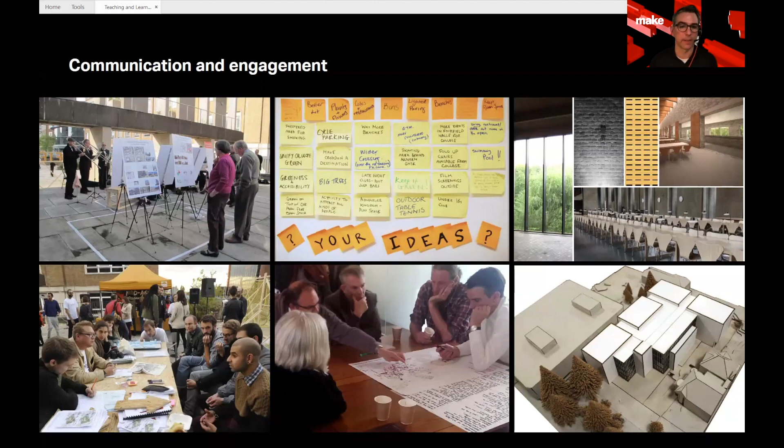Our design was to create a really generous spatial structure. So there was some rigor and organization to the building, but it could be adapted and modified depending on how people wanted to use it.

I'll summarize some key characteristics of the building. We were keen to have a concise and durable palette of materials. This building is timetabled and has incredibly high footfall—over 2,000 people potentially arriving and leaving at the timetable switchover on an hourly basis. So whatever we specified needed to be robust, durable, and economical for the university to maintain. That led us down the path of having self-finished materials.

The predominant material is CLT—exposed timber everywhere. Then we have a glazed external terracotta tile. At the lower levels, where we need it to be really robust with lots of footfall, it's an architectural masonry block.

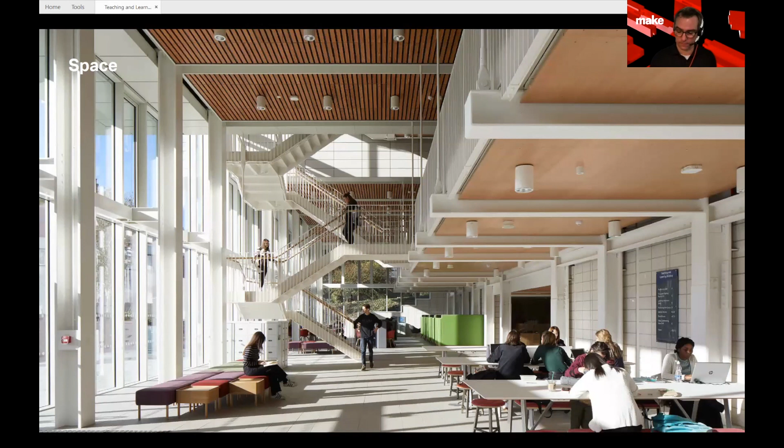Another key aspect was making sure we provided flexible and adaptable spaces that could be adapted over the academic year, that the university could utilise over the summer holidays for other uses like conferencing, while also supporting more traditional educational practices.

This building does have a lecture theatre and a number of seminar rooms, but the large majority of it is more fluid, unprogrammed space, with lots of spatial variety for students to use in different ways, rather than adapting by moving walls and furniture around, which we felt wasn't a satisfactory solution. All the spaces converge on this central atrium, and the idea is to promote social interaction and visual connection between people as they move around the building.

Sustainability was almost like a fundamental part of our design approach. The building is BREEAM Excellent. Our approach to this was almost like a passive design approach, so it's obviously fabric first, creating a really high performance facade and natural ventilation wherever we could. So we're using the atrium to ventilate the building, taking advantage of the stack effect.

Stale air is drawn through the formal teaching spaces, through the atrium, and exhausted out through the roof. We've also tried to maximise the benefits of on-site renewable energy by using photovoltaics. We spent a lot of time thinking carefully about the quality of natural light and making sure we had the right amount of it to minimise glare.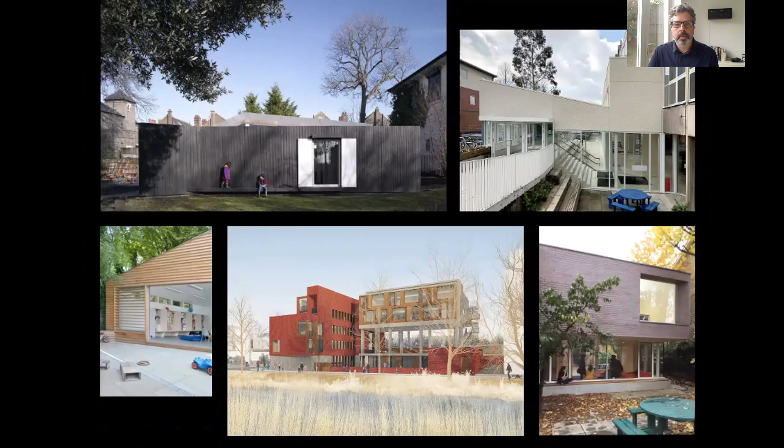Just one moment. Okay. Great, wait a second. Oh, that's interesting, because Zoom is hiding my notes.

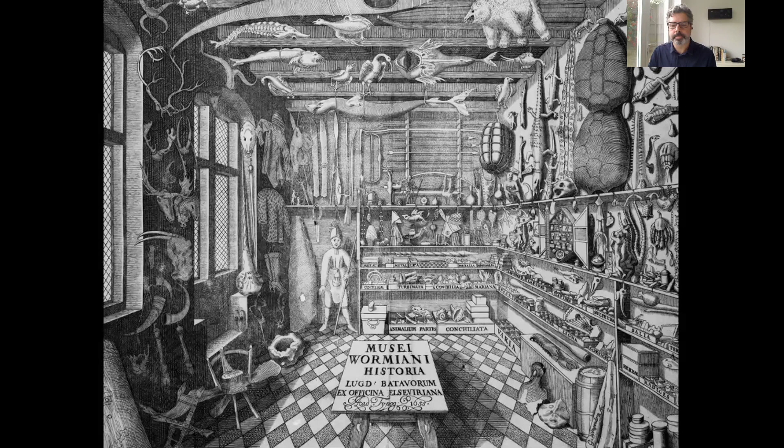So we began with the school an iterative design process focused on how the building's own physics can create an environmentally conscious classroom. The first sketches are quite ambitious in all that the building could provide for the school, including a mezzanine for storing experiments and artifacts, and a sky room with a retractable roof light for stargazing, or to see the space station whiz by, perhaps.

And the school was also keen for the building to improve its relationship with the main road and the surrounding community. Many people in the local area had no idea about what lay behind this high wall or had any view of the school's creative ethos. So the building almost became a kind of vehicle to help form this new connection.

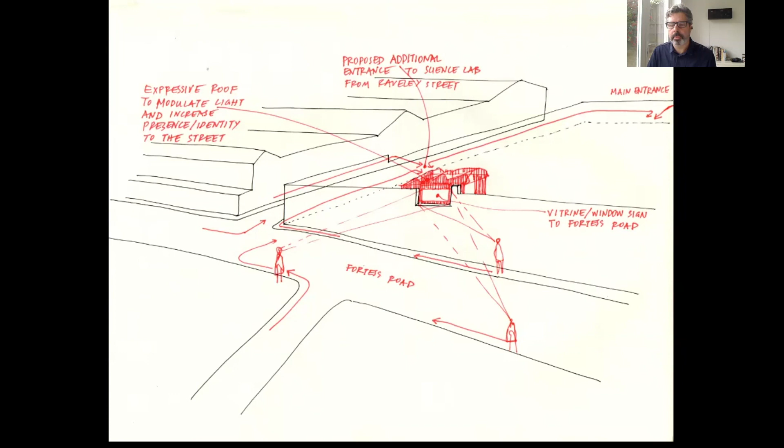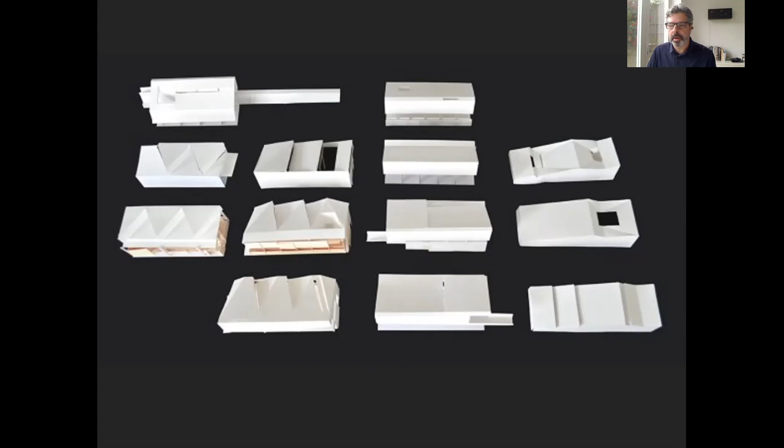So in designing the project, we made more than 30 physical models to test the initial design options. And we worked closely with an advisory group made up of teachers, staff, pupils, and parents. The pupils were called the lab rats. It was an acronym for something I can't quite remember, but they were a fun group to work with.

So the first design concept was quite ambitious, and this included the mezzanine, archive, and the sky room. You can see this, the skylight. This was tested with planners, and they said the scale was too large. And this was supported by the QS, who said it was too expensive.

So the design evolved, but the key design elements and important passive design, environmental design principles that were established at this early stage remain throughout the entire design process and are evident in the finished building.

So the key elements of the design were to showcase the lab stations and their activities and its equipment inward towards the school. It was also very important to create a high space for carrying out experiments and hanging children's work. And we wanted to create this visual connection through the boundary wall.

We had already started working with environmental design consultants, Ritchie and Daffin, to develop a passive design strategy that worked within the site constraints. So the core principles of that were to create good natural daylighting conditions with north-facing openings in the roof, interactive ventilation during all seasons, while shielding from the noisy road.

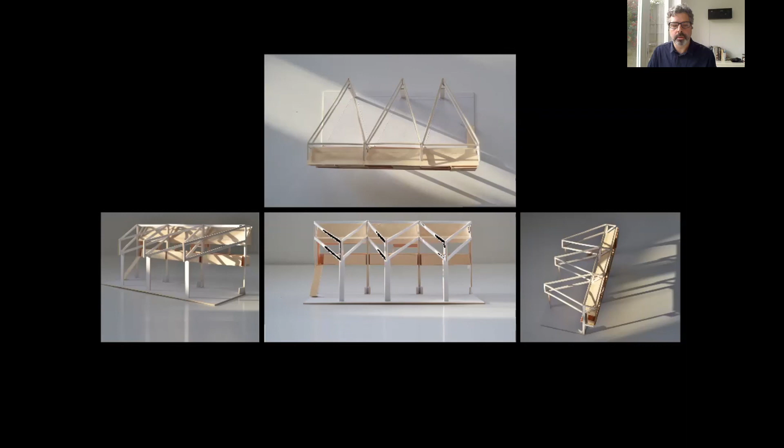So we explored a timber frame construction from the very outset on environmental, aesthetic, and economic grounds, collaborating with structural engineers Price and Myers on developing a design based on using standard sawn timber elements. This model shows that initial iteration and how the timber structure would be designed, or at least an idea for that.

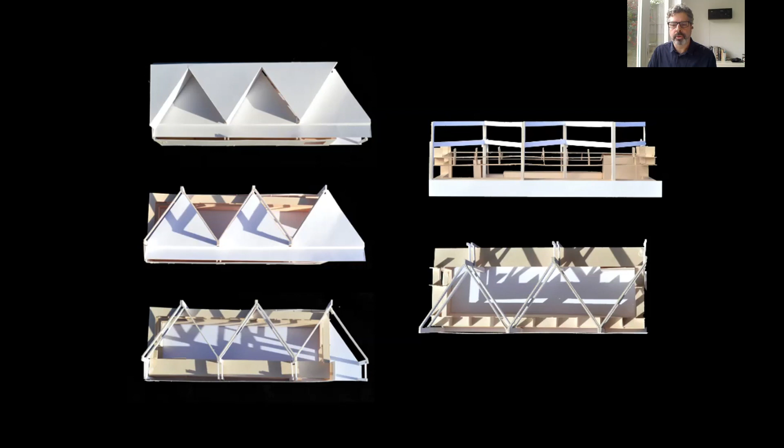This is an in-between iteration of the design prior to the final design, where the building shrunk to a single story with higher extruded triangular volumes. These volumes shown here were 3 at the time. This was a simplified approach to providing desired internal height, bringing in ambient daylight through the roof, and the extruded triangles would also reduce the impact of the building as seen from the street, addressing planners' initial concerns.

Sorry for the background noise. Our neighbor decided to do some building works all of a sudden.

So the primary and secondary structure consists of sawn spruce beams, columns, and joists in standard sizes with quite simple detailing for the timber connections. And this is a drawing as a summary of that we gave to the structural engineers, to Price and Myers.

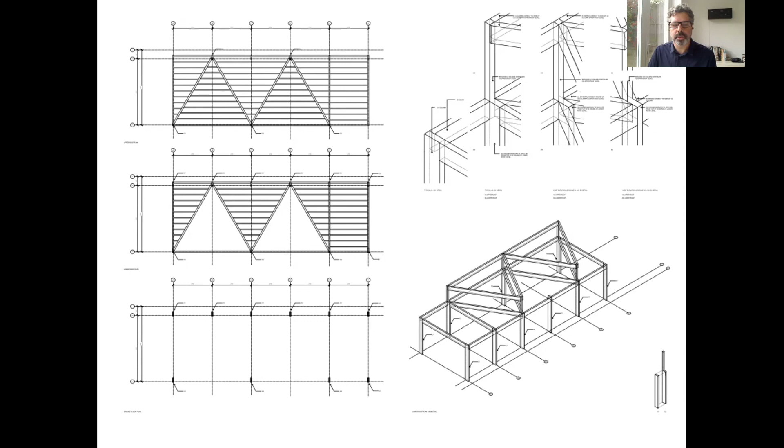So the plan, it's a very simple, single, flexible space with children lab stations along the playground side and storage aligned with storage internally, a single toilet and a storeroom on one end. The storeroom also acted as a dark room.

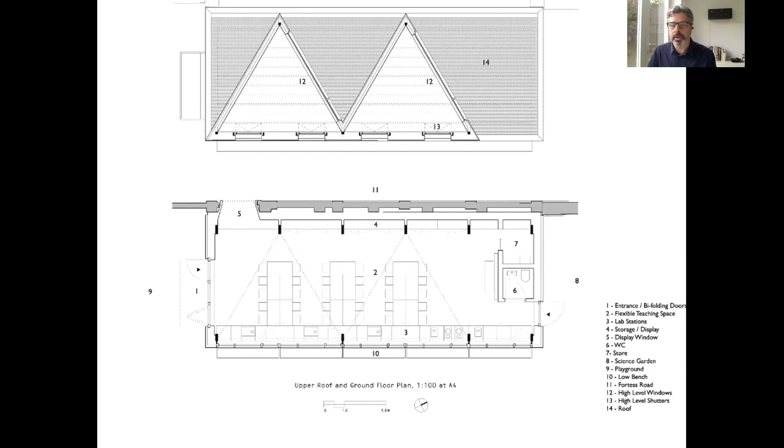The upper roof shows the north-facing roof lights and the vents, high-level actuated vents on the east facade facing the school that sit behind the external cladding. The vents are controlled by an air quality sensor that children can see in the classroom.

The section quickly shows the level differences from the street to the classroom to the lab, and the deeply punctured window acting as a display window to the street.

Just after getting on site, the project came to a rather abrupt stop when the contractor realized that the existing Victorian shelter was actually restraining the boundary wall and preventing its possible collapse. The boundary wall had already been underpinned by the council a few years prior, but to questionable effect, so securing the wall was a major task that took a few months.

Part of the upper section of the wall had to be rebuilt and became timber-clad to tie into the building. In addition, excavations for the foundations revealed hidden Victorian structures below the site, which is built-up ground that was never really apparent, so the foundations needed to become much deeper.

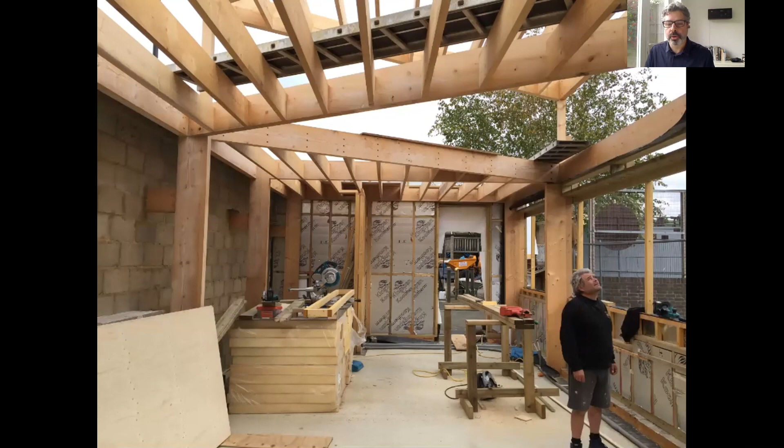This all caused significant delays to the project, but we finally started to erect the frame. This image shows how the frames of the building acted to restrain the retained section of the boundary wall where the building was.

We understood the project to be a pioneering model, a new building typology dedicated to teaching the sciences for nursery and primary school pupils. From what we understand, this is the first of its kind in the UK.

The internal space is lined with walls of built-in furniture of spruce and birch-faced and formica-faced plywood. The atmosphere is like an elaborate garden shed with the smell of wood.

The display cases host a growing collection of specimens and objects brought in by the school community, and the lab is a shared resource with other schools. Here you can see the north-facing roof lights and the vents.

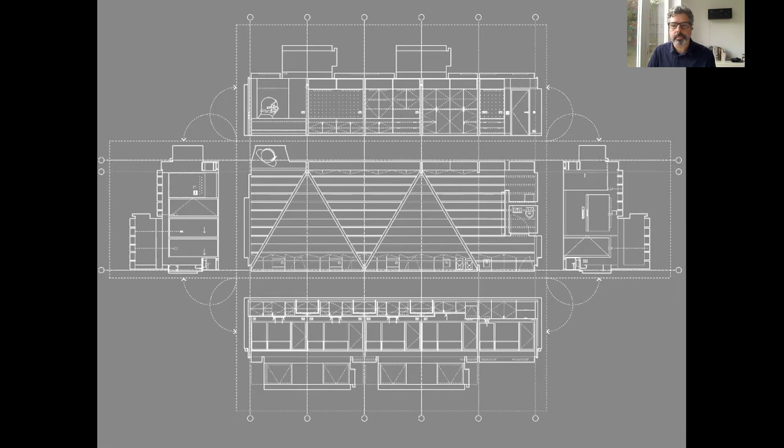This shows a technical drawing of the unpacking of the internal elevations, the lab station, storage, and structure. The timber structure is a teaching device engaging children with geometry and technology, allowing children to unpack and analyze the parts of the building intuitively.

The external cladding is a thick profiled Siberian larch rain screen. It is closely spaced at low level to accept impacts from playground use and to prevent small fingers from getting trapped. The spacing becomes wider at high level to allow a lighter effect and airflow to the concealed vents behind. We also created a bench along this elevation facing the school and playground for children to sit.

There are also bifolding doors which allow the activities from the science garden and the science lab to spill out onto the playground.

Here we collaborated with the practice Unit Lab, who created an anamorphic playground - play equipment that plays with perspective and visual distortion. These are quite unusual objects.

We also worked with Electric Pedals, who made a school disco powered by two bike generators, which was a huge hit.

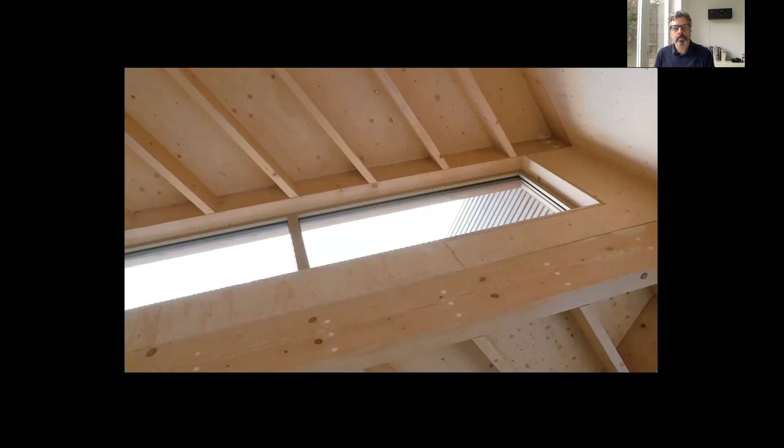Good morning to the students of Eleanor Palmer. I'm delighted to be speaking with you this morning. So many teachers inspired me to pursue my dream.

So that's how it's going to work. Once you're happy with yours, you can then make the box.

Hi, this is Natasha, and my question is, does being in space make you feel differently about Earth? Over.

Yes, Natasha, great question. When I look down at the Earth, and I think many astronauts feel this too, we don't see borders. We just see these beautiful continents surrounded by water. It also gives me the sense that the Earth is really a big blue and white spaceship. Just like we take care of our spaceship, the International Space Station up here, we really need to take care of the Earth as well. Over.